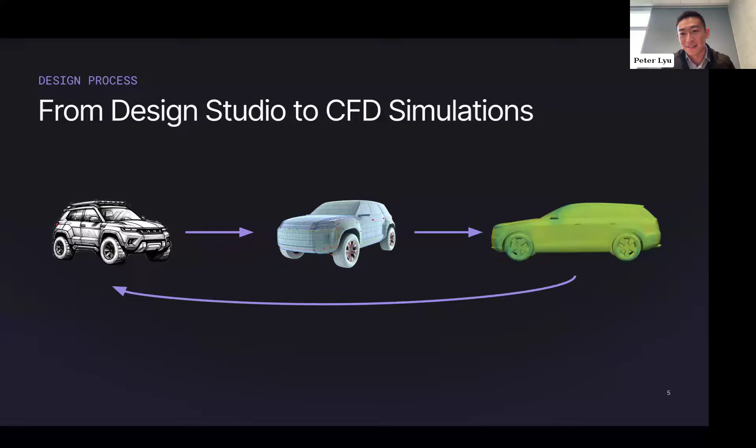Now, oftentimes the styles and what the CFD engineer wants can conflict, right? So there's some negotiation going on to adjust the taper on the back end a little bit to reduce the drag and things like that. And while design is everything — generally speaking, for automotive, people buy cars because of the brand, because of design. Well, actually, if you're attending this webinar, you might be buying a car because of its aerodynamics, but it's fair to say most people buy a car because of the look, because of the style.

And when we work with some of our automotive partners, they come to us with a challenge: is there a way we can develop a tool to provide instant CFD feedback to designers and allow them to actually understand the performance of the car early on in the design phase, so they can incorporate CFD into the early design phase without actually having any CFD knowledge?

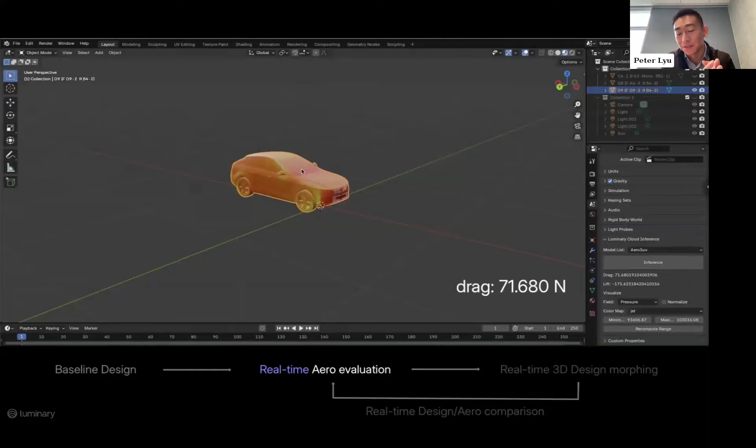I'd love to show you what we got to, and we can talk about the behind the scenes. What we're able to develop is actually a physics AI model embedded into a tool that designers use. Many designers out there use Blender or Alias. In this particular case, we have a plugin into Blender, where as a designer, I can take one of my designs and click just an inference button, and immediately get feedback on the performance of the vehicle — lift, downforce, pressure, and things like that.

But also you can actually morph.

You can use a sculpting tool. You can have different ways to change the geometry. And as soon as you change the geometry, instantly you can click inference and get immediate feedback on how this new design compares to what you have in the past. It provides a very powerful tool in the early design phase for the designer to compare different designs and understand the performance without needing to go through the loop of CFD simulations. You can look at the results right away.

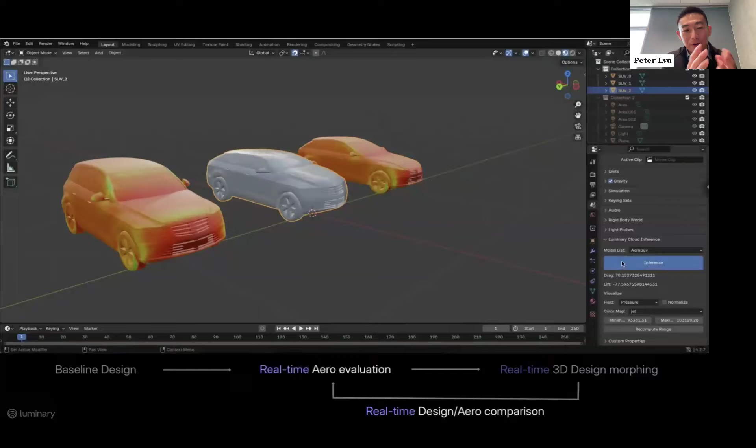When we showed this to our partners, they were quite excited. And obviously the simple question is, what's the accuracy? How accurate is it? We spent a lot of time looking through that as well.

Now let's talk a little bit about the process of developing this model. The process we follow is quite similar to most AI/ML pipelines. We start with data, high quality, high fidelity CFD data. With that data, we pre-process it into a format that the model can consume, and pass that into model training. Once the model is trained, we can pass it over to physics AI inferencing and visualization. That's fairly lightweight, and it can be embedded into different visualization technology out there.

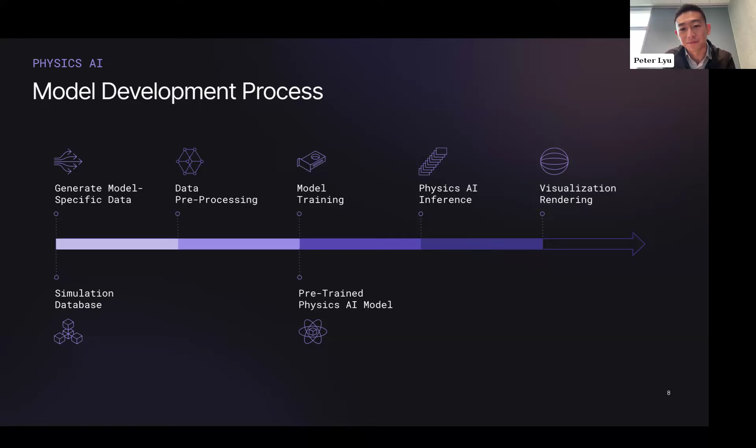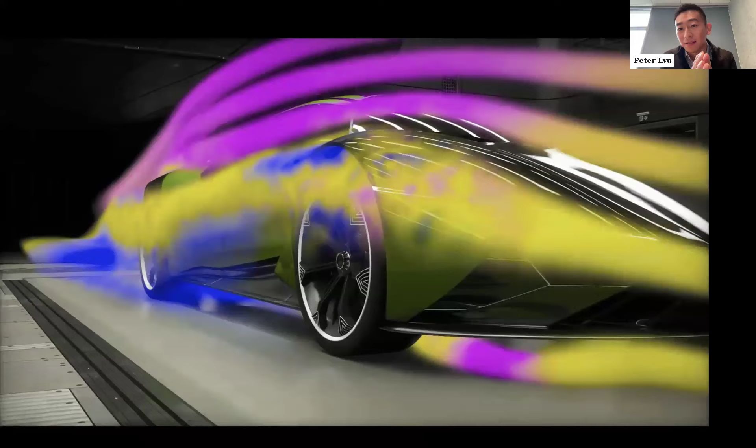This whole journey actually started last November when we began collaborating with NVIDIA on this concept of a virtual wind tunnel in Omniverse. We've come pretty far. We were able to put the whole framework together, generate the data, visualize the data, all inside Omniverse, and create amazing animation as you see here.

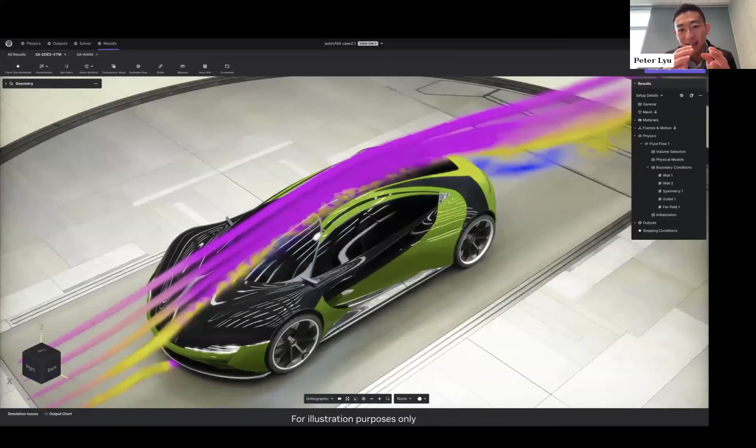But if you're a CFD practitioner like me, you'll probably look closer at the data or the results, and you'll question, okay, how accurate is it? Does the flow here actually make sense?

Now we look at this and take a look at accuracy. What we recognize is that the accuracy is not completely there yet. What are the challenges there? We recognize data is actually the bottleneck here to create a very high quality, high fidelity physics AI model.

There's lots of data out there for large language models. You can scrape the internet and pull a lot of data out of it, but there's actually very few public domain or open source physics-related data in the CAE space that you can use for training. We're not talking about just a dozen simulations. We're talking about hundreds, if not thousands, and tens of thousands of simulations. That's the level of data we need to get to the accuracy we expect.

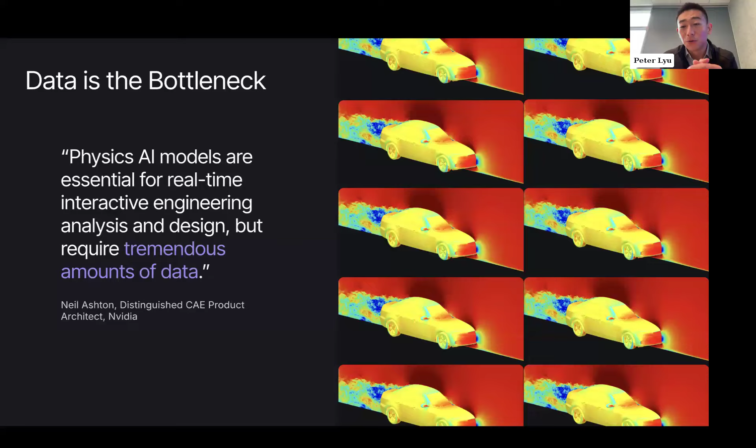So that's what we have been focusing on at Luminary ever since. We have developed, over the past 5 years, a cloud native and GPU native CFD solver. The amazing part is that we can run simulations extremely fast. We're talking about RANS simulation in the order of 5 minutes, and DES simulation in the order of an hour or so. But not only that, we also focus on the ability to run tens and hundreds of those simulations concurrently, which is crucial to generate the data set quickly. And we support RANS, DES, LES, and the whole range of fidelity.

For this particular work that we're showing you today, we're actually using our DES solver with the SA turbulence model. As you can see, we're solving time accurate, but we use time-averaged solutions to train the model.

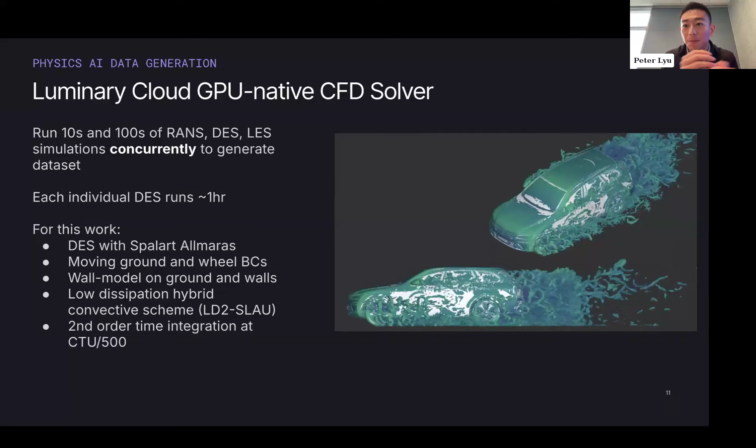Now, with that, we also take a wider look at the whole ecosystem, and we're very fortunate to have lots of partners already supporting the physics AI model development process. Generally, we break this down into 4 buckets. We start with design generation, using CAD or STL tools and things like that to generate different designs and populate the design space. Once we have all those designs, they feed into Luminary Cloud, and that's where Luminary Cloud really shines—being able to run those designs at high fidelity, concurrently, to generate a data set for the training.

Once the data is generated, we feed it into the model training framework. It's great to partner with a company like NVIDIA, which has developed PhysicsNeMo models—we'll go into details. But there are also other companies out there, like Neural Concept, PhysicsX, that have developed amazing technology to train the model. Once the model is trained, it's great—it's very lightweight, very portable, and you can deploy it anywhere for inferencing. You can use tools that designers use, such as Blender or Alias, or put it into spatial computing like Vision Pro or NVIDIA Omniverse to visualize and understand the design and the results.

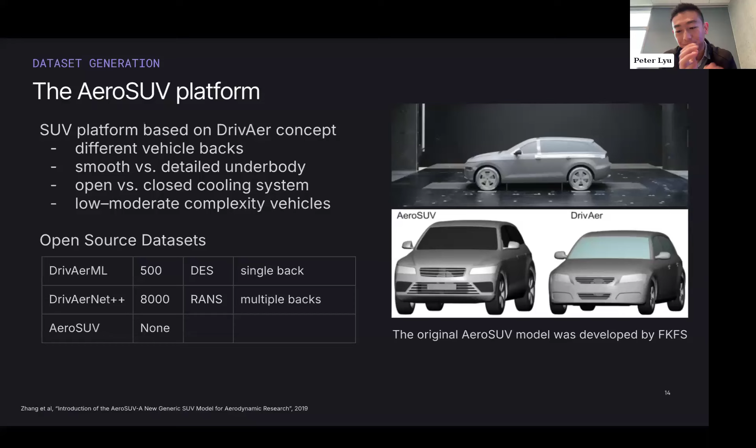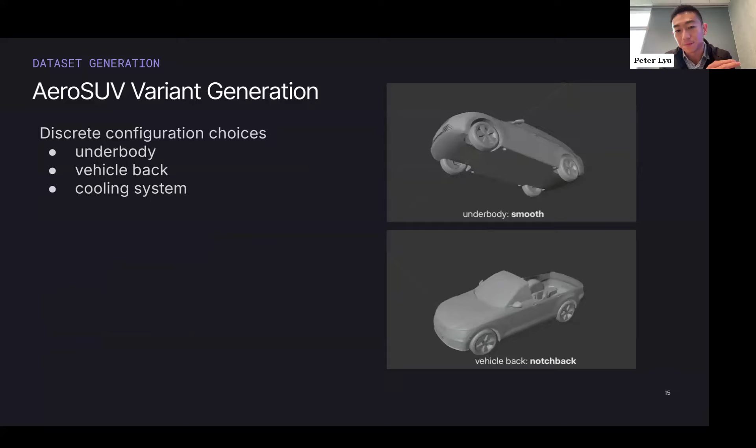The AeroSUV geometry has quite a few different variations, which is great. It gave us the opportunity to create a very large data set of all the variations of the designs. It has a detailed underbody, a smooth underbody, open cooling and closed cooling systems, and things like that. On top of that, we worked closely with our partner at Honda to define some of the design changes that a designer and OEM cares about.

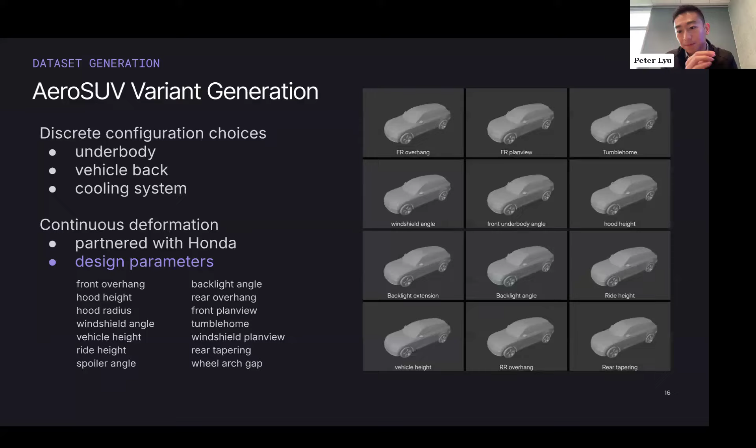So we identified a number of design changes we can make to populate the entire design space, and those are continuous changes, meaning you can stretch the vehicle continuously. For the initial data set, we down-selected a smooth underbody. We're going to have both estate and notchback geometries with a closed cooling system. We also decided on 7 design variables to start with to morph the geometry, and we used Latin hypercube sampling to populate as much of the design space as we can with this initial data set.

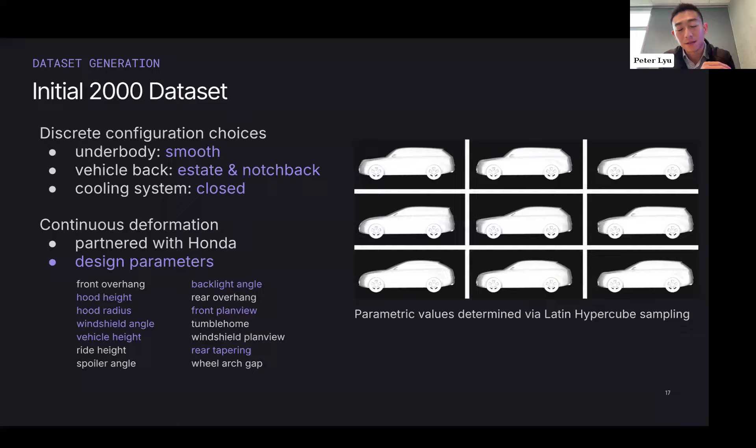The result of it is that we use this morphing cage, and we're able to stretch the vertices on the morphing cage. As you stretch the cage, in turn the geometry inside gets stretched. Using those methods, we're able to generate all those variations of geometries for this initial data set.

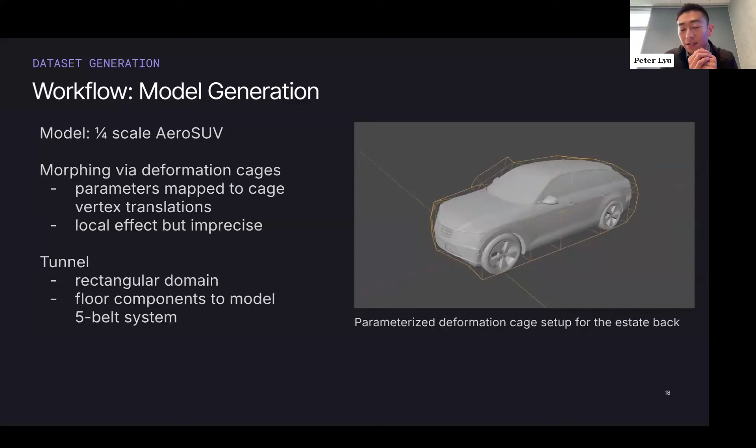And the result of it looked like this. This is a side view of all the different geometries that we've generated, and imagine there are 2,000 of them now that we have generated. Internally at Luminary, we actually play this game where we pause the video at some point and pick the closest vehicle on the market that looks like that shape. Surprisingly, this variation actually covers a quite wide range of shapes that you see on the road already.

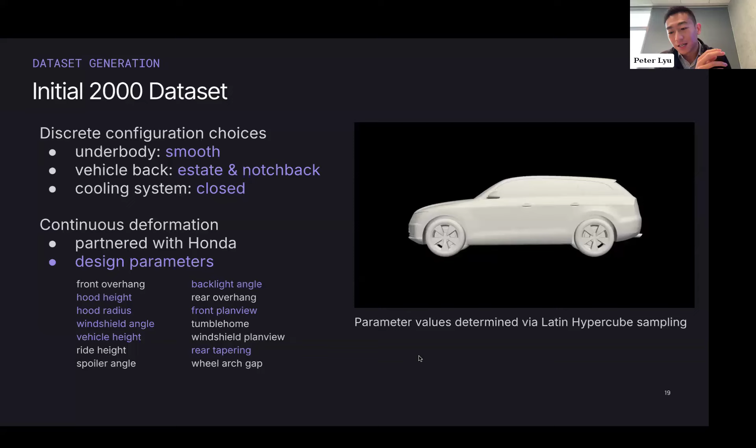So with those shapes generated, it looks like this. Again, imagine there are thousands of different geometries that we've now generated. The next step is to mesh it. In this particular work, we use ANSA to create a mesh, and we're following the best practices from the Auto CFD4 workshop to make sure we have the right refinement region to capture the wake and resolve the geometry well.

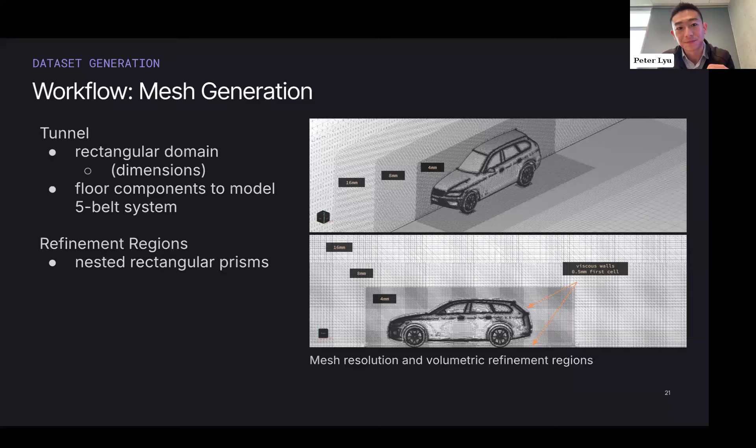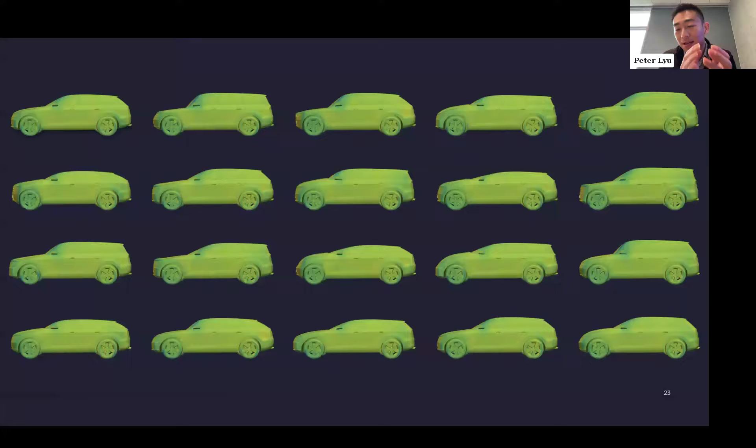Now once we have the mesh, the next step is data generation. So that geometry and meshes got fed to Luminary Cloud. We already talked in detail about our solver, but we're able to run those geometries concurrently and generate those data sets. These are, again, high quality, high fidelity simulations. We're talking about running DES simulations, and you can see you can actually resolve the wake quite well, which is quite critical for an SUV, which is pretty much a bluff body. So the wake structure behind the vehicle is quite critical for predicting the drag.

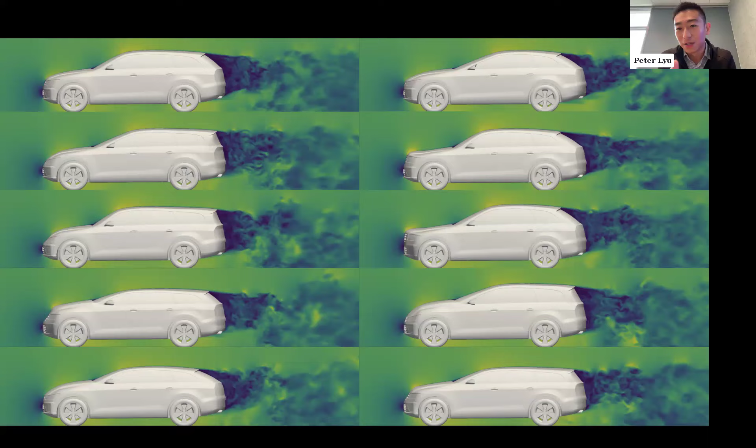Now, once the simulation results are generated, the next step is model training. Here we partner with NVIDIA to use the PhysicsNeMo framework. There's no better person to talk about this than the author of the Domino model, which is part of the PhysicsNeMo framework. So Rishi, I'll pass over to you.

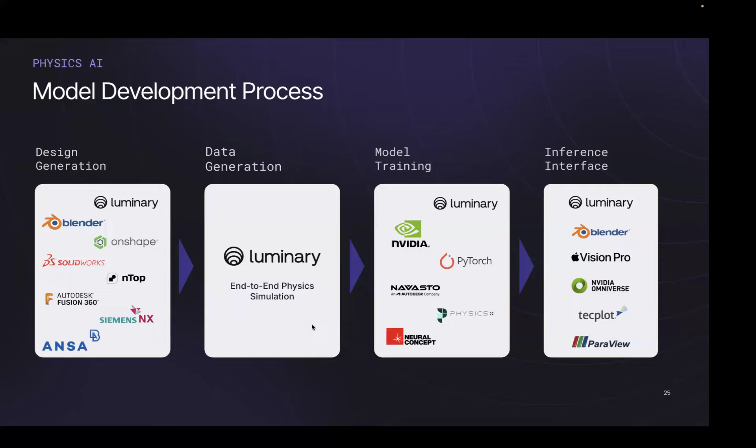Thank you, Peter, and thanks everyone for attending this webinar. I'm going to be talking about NVIDIA's PhysicsNeMo framework, go into some technical detail of the model architecture, and then hand it back to Peter to describe the results.

PhysicsNeMo is an enterprise-grade framework and toolkit that NVIDIA is building for developing physics AI models. The main goal of PhysicsNeMo is to enable ISVs such as Luminary Cloud, automotive engineers, simulation engineers, and machine learning researchers to build physics solutions faster.

Peter mentioned the importance of data sets and having large data sets in the context of physics simulations. But when it comes to simulation data sets, you often run into challenges of scale, complexity, non-linearity, and so on. So to take these data sets and actually build a model from them is a tough task, and that is the journey PhysicsNeMo has embarked on. The PhysicsNeMo framework provides all the utilities, functionalities, and workflows that enable the community to take data sets and build accurate, generalizable, scalable physics AI models out of them.

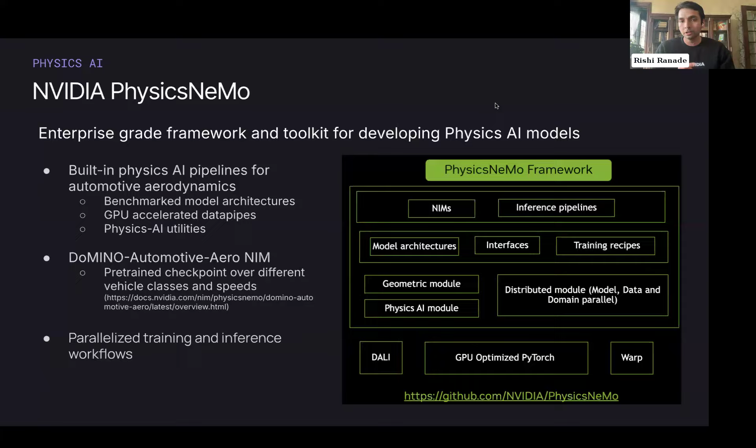Next slide please, Peter. In the context of automotive aerodynamics or CFD, I'm going to discuss some of the AI model architectures we have provided in the PhysicsNeMo library. The four architectures are FigConvNet, XAeroNet, AeroGraphNet, and Domino. FigConvNet is a point cloud-based architecture with a UNet plus point convolution combination. XAeroNet is the mesh graph net, scaled to handle million-cell meshes.

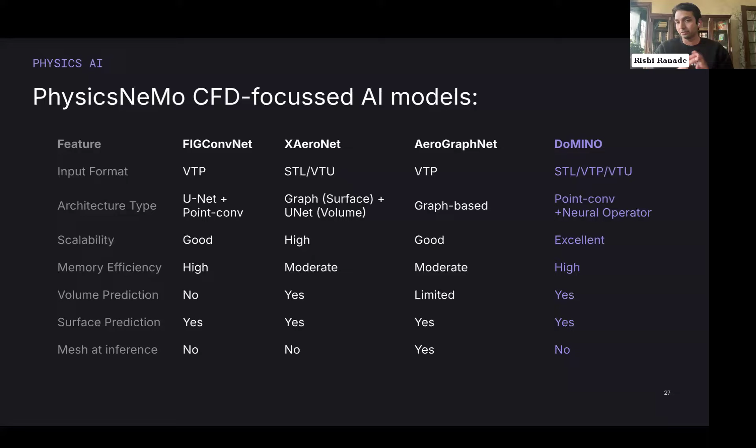The third one is AeroGraphNet, which is the original mesh graph net, and finally Domino, which is the point convolution neural operator that NVIDIA recently released. On this slide, we provide trade-offs between these architectures, enabling the user to choose one or the other based on the application physics they are trying to model. For this work, Peter and the Luminary Cloud team used Domino with the PhysicsNeMo framework to train the data generated for this use case.

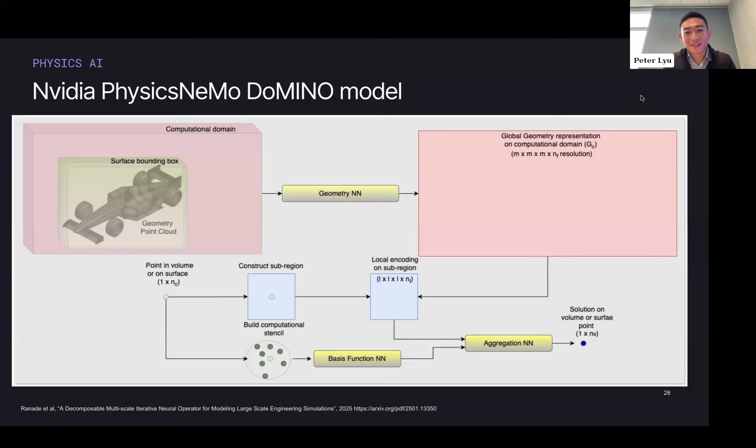So we took this framework and applied it to the air SUV problem you saw earlier. As we're generating more and more data sets, we continue doing the training and refining the model as we go forward, and it's great to see the training is quite efficient.

For the 1,000 data set training on the surface, it took about 13 or so hours on one node of GPUs, and you can see the training loss has stabilized toward the end. We're able to get a trained model out of it, based on summarizing all the data set that we have.

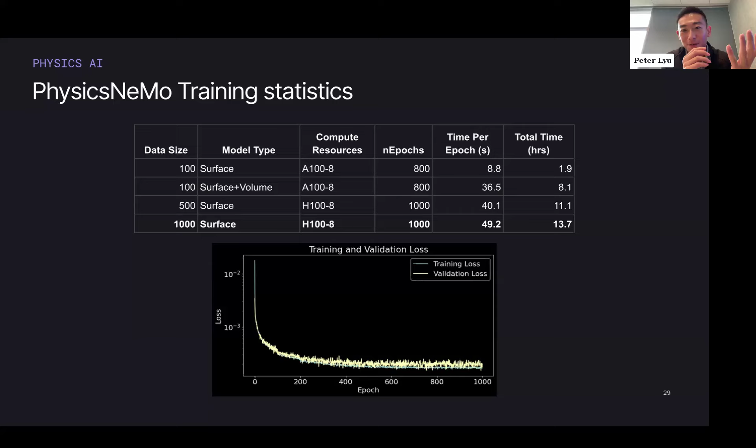Now, the first question you're probably going to ask is how accurate are the results. That's also my very first question when our team put this together and looked at the results. I want to show you a couple points in this design space - some are very accurate, some are not as accurate - let's take a closer look.

We randomly selected a few geometries and design points. This particular one is actually quite accurate. On the left is the CFD results, and on the right is the inference predicted results from the DoMINO model. Drag is pretty much spot on - same drag force. Downforce is about 6% off compared to the two models. The surface results you can't really tell visually, but the quantity of interest is about 6% off.

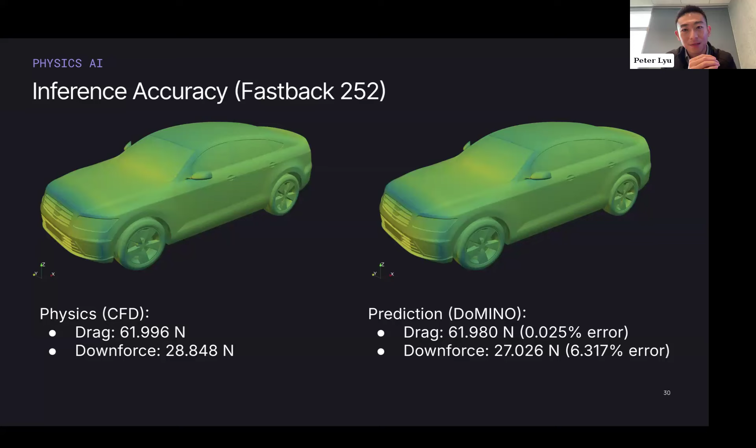To be honest, I'm actually really pleasantly surprised even looking at these results. We're just starting with this initial data set we generated, and we're going to generate a whole lot more data. I fully believe as we go forward this accuracy is going to continue to improve, and if we get to the 2%, 1% range, I think we can all agree that's going to be a very usable tool in the design process.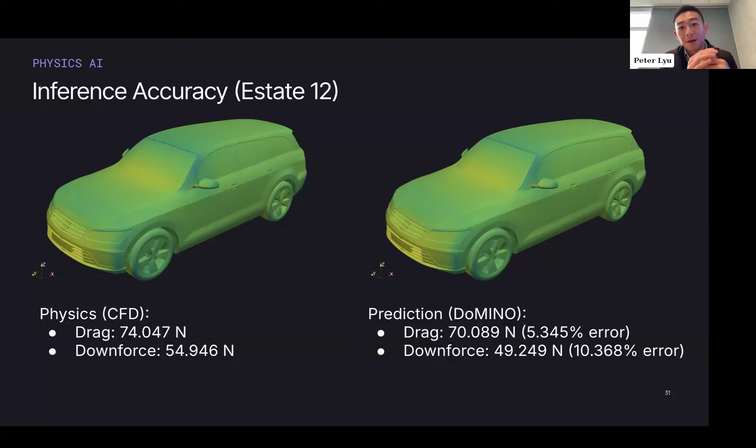Across this entire dataset so far, we're seeing an average error of about 2%. 94% of the predictions have 5% or less error, and all predictions are within 10%. It may or may not be usable yet, but as the data size increases, we truly believe this is trending in the right direction, and we will have a tool that's going to be amazing for the industry to leverage for inferencing in the early design phase.

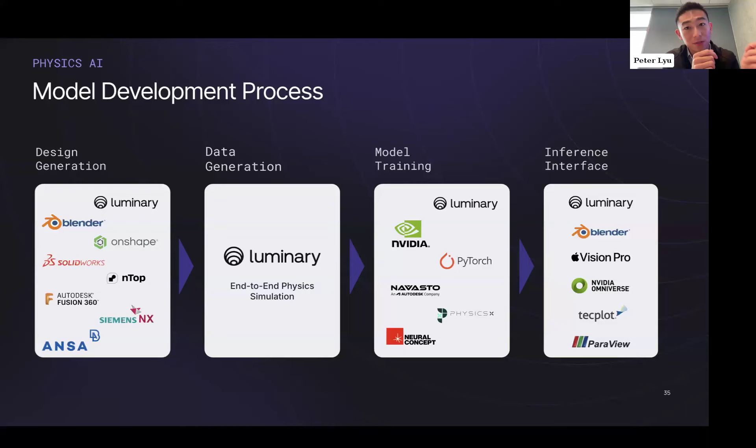Now, the last step, once the model is trained and validated, is inferencing. The nice part with a trained model is that it's very lightweight—the file size is fairly small compared to the dataset itself—and it can be very portable. It can be deployed anywhere, offline or in the cloud, and it can be deployed in conjunction with the tool the designer actually uses. We showed this earlier in the presentation, but in this particular example, the inferencing model is deployed as a plugin to Blender.

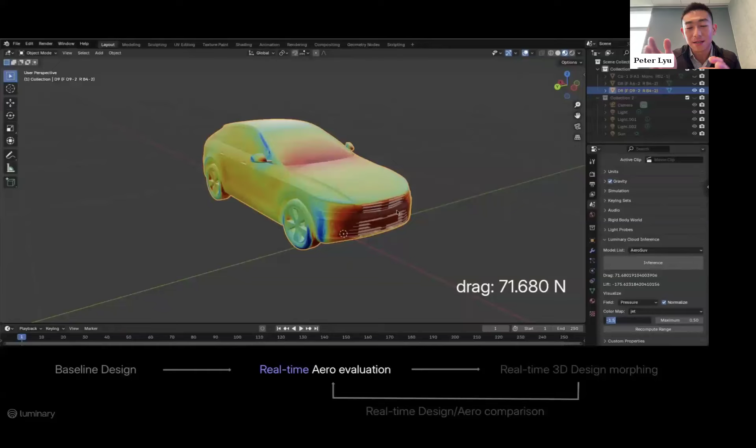As we talked about earlier, it's an amazing way that, just inside Blender, you can leverage the dataset and the inference model to predict what the drag is. As you add more design elements and make changes, the tool is right there giving you instant feedback. The nice part is that inferencing is extremely fast, on the order of seconds, giving near real-time feedback to the designer on performance.

Now, if the speed is there and hopefully the accuracy continues to improve, we truly believe this is going to be a wonderful tool for design engineers and studio engineers to leverage in that early design phase.

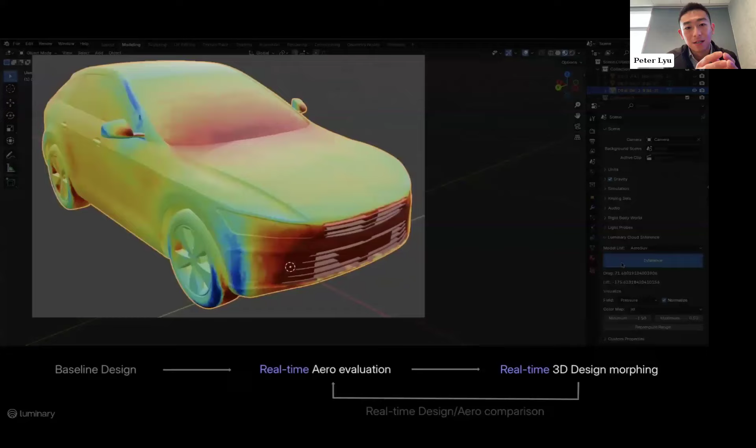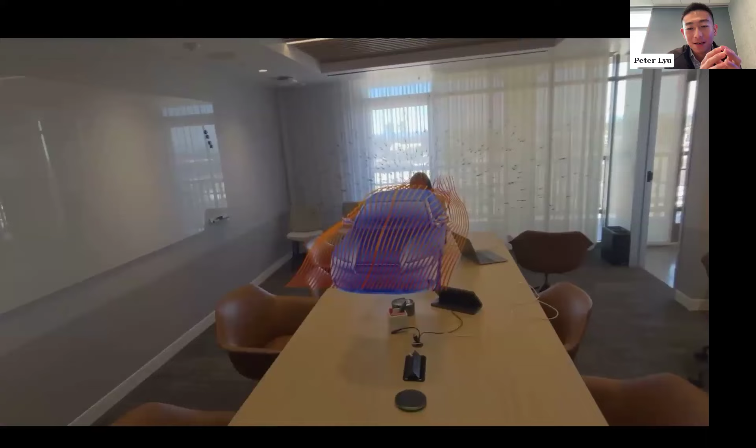Now, I'm a huge fan of Vision Pro, and one of the things I love to do is look at how we can incorporate spatial computing into the workflow. One of the things we're working on, also collaborating with the NVIDIA team, is to deploy an inferencing model into Vision Pro so you can stream from Omniverse into Vision Pro to do inferencing and look at the results. I think that'll be a great future—where we have a model we can look at, morph, sculpt, and inference in real time inside Vision Pro.

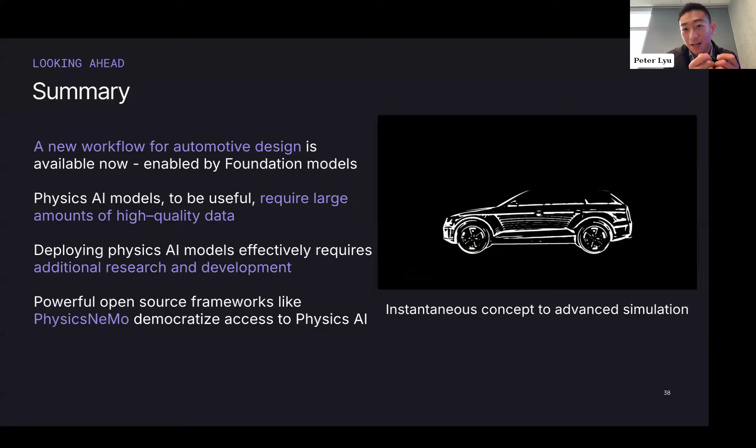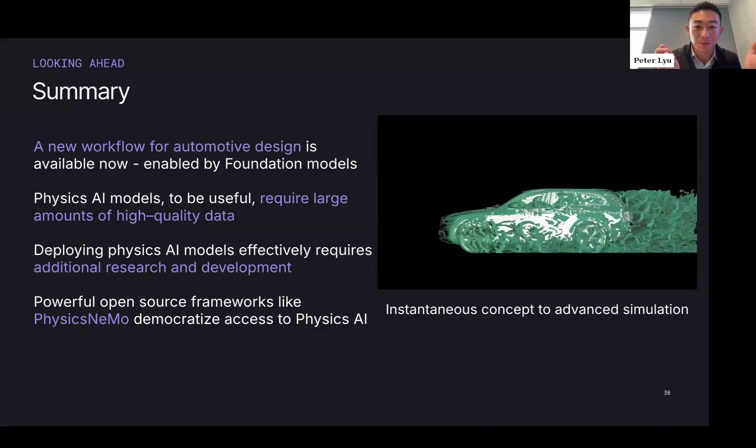So hopefully today we've shown you a very exciting starting point, and we are at an inflection point of a new way of doing aerodynamic design. We're making this model available so we can provide this dataset to the community, and we've shown a way to develop and chain the entire workflow together end to end, going from the geometry all the way to the framework for doing inferencing. We're also excited to announce that we are open sourcing both the dataset and the foundation model trained with DoMINO in this presentation.

The 2,000 DES simulation dataset is already available today, and by the end of the year we're going to get to 25,000 DES simulations, which is an amazing large amount of data to be able to get to the accuracy that we need for those types of design.

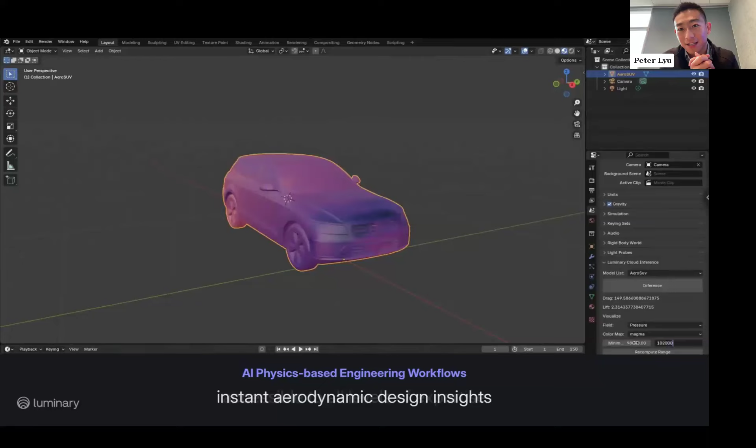I really think this is just the beginning point. We're seeing really promising results with this initial dataset and with the methodology we developed together. We're excited to see what we can take further and to see how that may change our day-to-day as CFD practitioners, and potentially the impact to external aerodynamic design in automotive. Thank you all for attending, and if you have any further questions for us, please reach out to us. I will wrap up here.